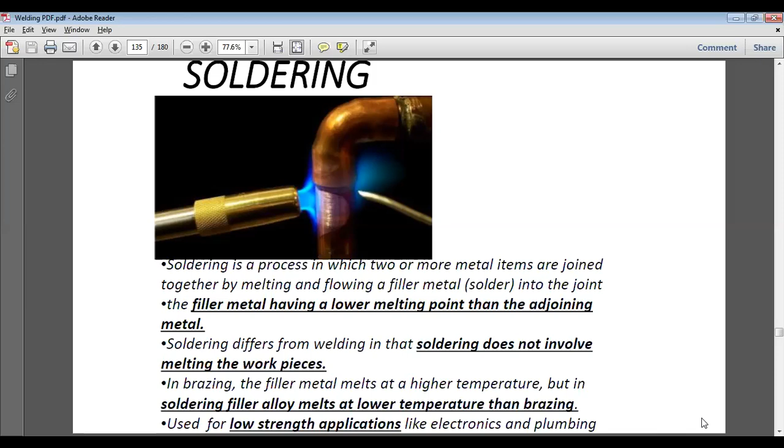We can see the solder wire, and soldering operation is performed at many places with a simple solder electrode, which requires two more things: one is solder wire, another is solder paste. By this we can connect any two wires in any two joints in electronic and control systems, like thermistors, transistors, and ICs, etc. This can be implemented in electronic, control and computing devices like laptops.

Initially we need a heat source. This heat comes by burning gases and low calorific fuels like a spirit lamp, etc. This way we produce temperature below 400 degrees centigrade. Also certain gases like methane and ethane are burned that produce temperatures below 400 degrees centigrade.

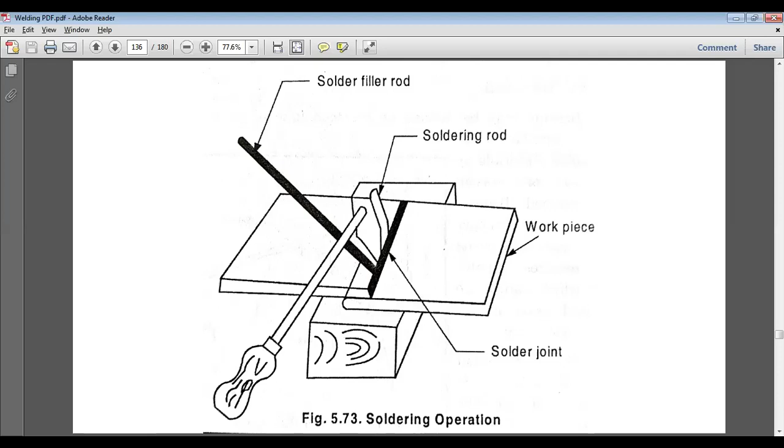So the source is a gaseous fuel source, and a filler metal or filler rod is applied in order to make the joint. This is known as the soldering operation. We have solder filler rods or filler wire that are used for providing a base to join both the two metals.

Solder wire is a combination of tin and lead. We have 40% tin and 60% lead, 60% tin and 40% lead, and 50-50. These are the basic solder wires that are commonly available in the market.

One is 50-50, then 60-40, and 40-60 - three types of tin lead solders. Then there's tin antimony lead solders, lead silver solders, and cadmium silver solders. These are used for different types of soldering.

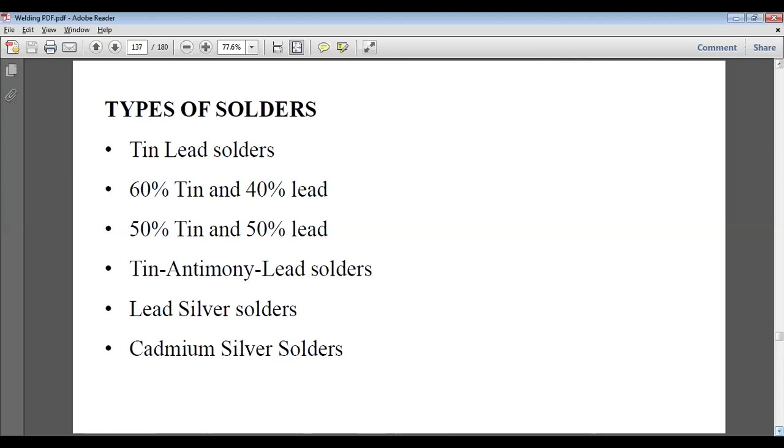Normally we use 60-40 or 50-50 tin lead solder available in the market, used for joining electrical and electronic wires and components. Lead silver is costly, antimony lead is also costly, and cadmium silver is very much costly - used for high efficiency applications in atomic and space research. So normally we use tin lead, that is 60-40 and 50-50.

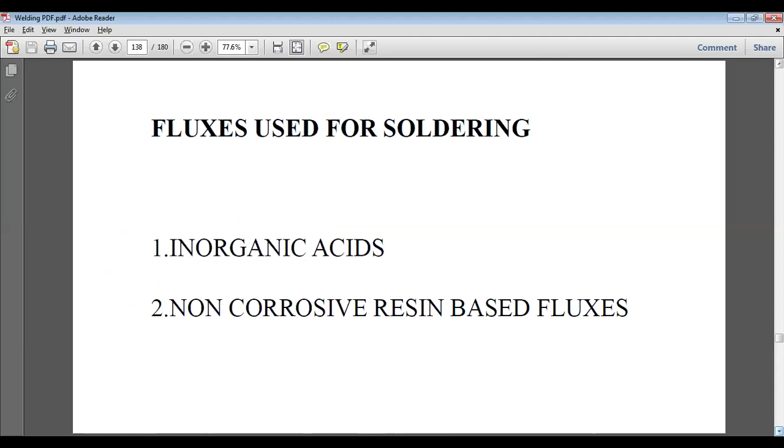Flux is also used for soldering - inorganic acids, non-corrosive resin-based fluxes - and these fluxes also protect the metal from the environment. Types of soldering methods: soldering iron method, dip and wave method.

This is a solder bath where we make a pool of molten solder metal in which we dip the two parts that we have to connect, basically for joining conductors. There we dip the end of the wires, take them out, join them together, and let them solidify. Solidification is very fast.

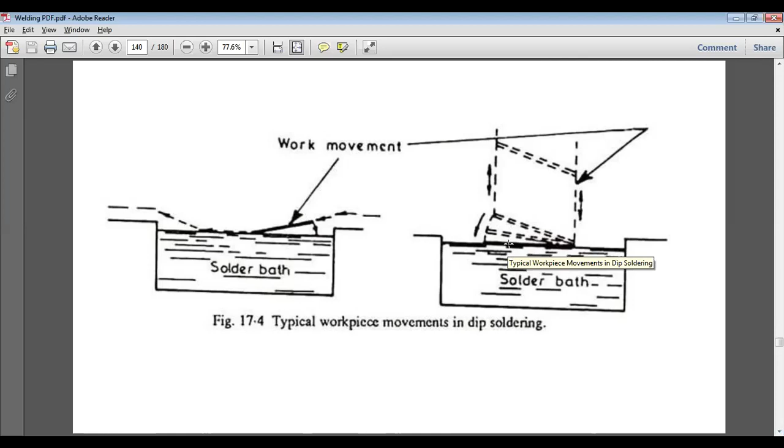So this is the case we normally use. You can see this is the work. This work is dipped, and once its edges are covered with solder liquid, it's taken out and combined together to give a permanent joint to the workpieces. So this is the work movement, and the solder bath is there.

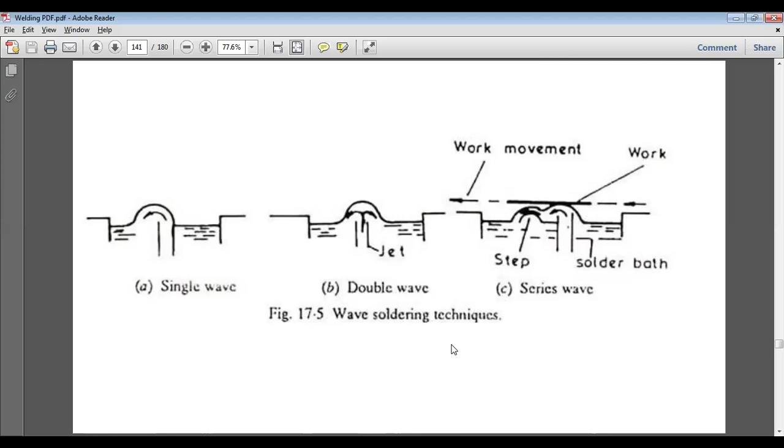Wave soldering technique - this is the basic technique. The solder bath is there, and you can see the work movement from here to here to here, then it's taken out. Single wave, double wave, series wave - wave solder technique is where we apply different waves of solder liquid. So this is the wave solder technique.

Then we have brazing - above 400 degrees centigrade for non-ferrous alloys, we generally apply a technique known as brazing. Brazing has higher strength than soldering, considerable strength, but it is not comparable - it has no match to welding, and falls well below welding in strength. So brazing is another technique we use for joining two non-ferrous metals like aluminum or copper alloys.

Their different shapes - wires, pipes and tubes, etc. So brazing is the process of joining two non-ferrous metals. It has little strength compared to welding, but at the same time more strength than soldering. Brazing differs from welding in that it does not involve melting the workpieces, and differs from soldering by using high temperature for a similar process.

A filler metal having a lower melting point than the adjoining metal is used. The filler metal has a lower melting point than the parent metal, and this way the solder rod is molten and combined with the two parent metals - this is how we do brazing.

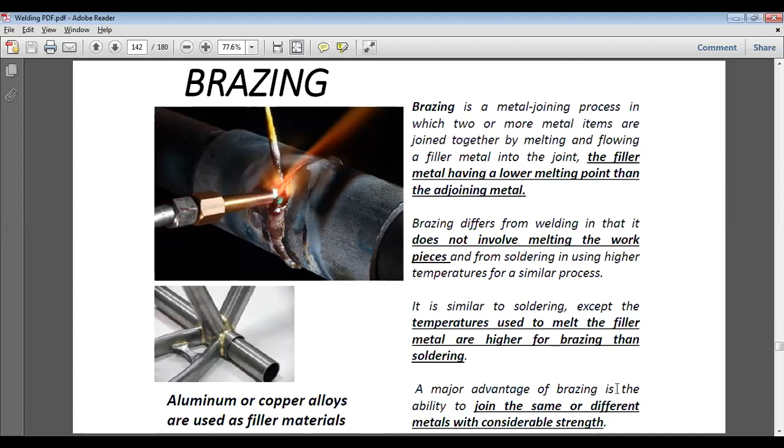This joins the same or different metals with considerable strength - aluminum or copper alloys can be implemented and produced this way. So this is the job, this is the hand torch, this is the filler rod. Then we have the basic brazing operation.

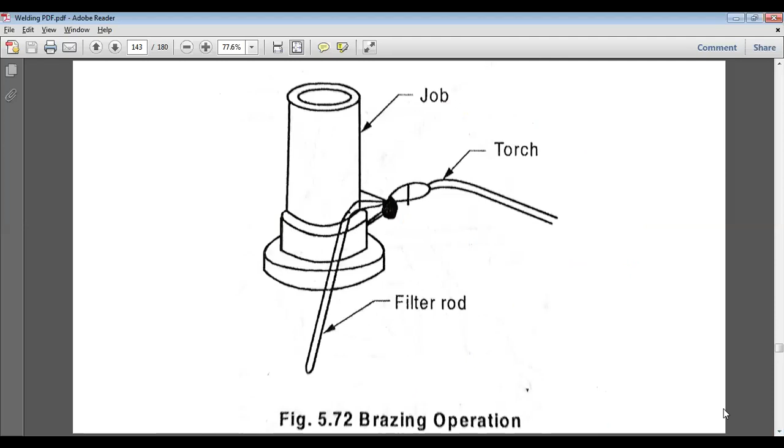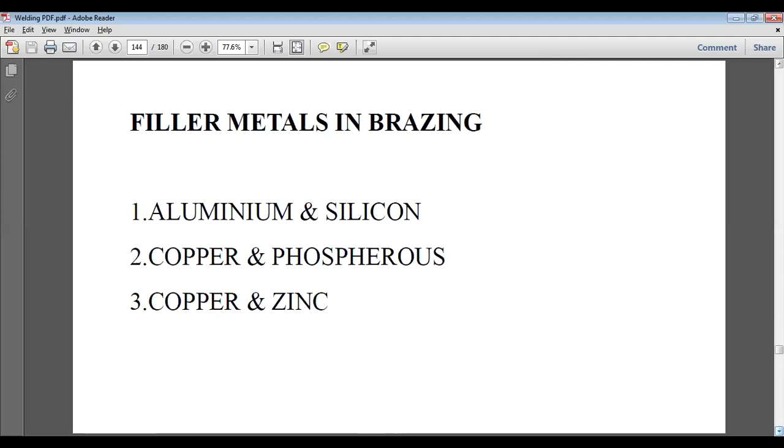This is the job, and this is the joint that is made. This way you can understand brazing. Filler metals used in brazing are aluminum-silicon, copper-phosphorus, and copper-zinc. These are three basic filler metals used in brazing.

Brazing processes include torch process and vacuum brazing. In torch process, we produce a torch as we have been doing in welding and soldering. In welding, we use high temperature for ferrous metal alloys, but in brazing we use torches of low calorific value fuels that do not produce high temperature, above 400 degrees centigrade but not 1200 or 1300.

So the temperature is low and the strength is low, making it economical compared to welding, though it uses precious metals, which makes it become more hard.

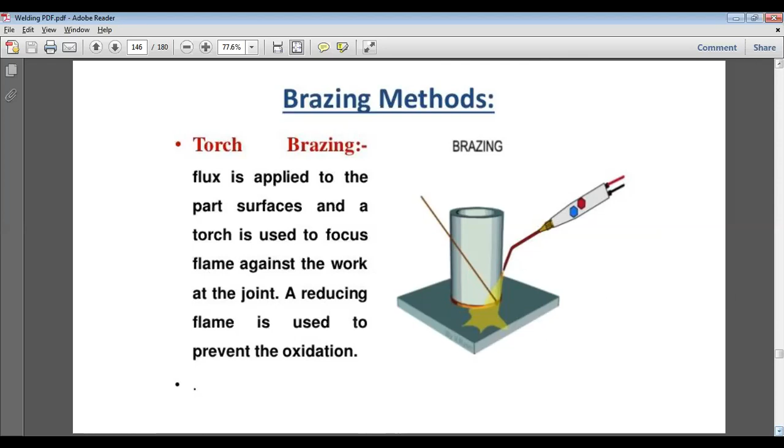So this way we have got to know welding, soldering and brazing. Now the basic difference - we have to compare them. It's very important to compare them.

Soldering has the weakest joint, brazing has more strength than soldering but less than welding. Temperature is very low in soldering, less than 400 or 450 degrees centigrade, whereas it may be 600 degrees centigrade in brazing, and in welding there is no limit - you can use very high temperatures. So the basic difference between soldering and brazing is temperature and strength: 400-450 degrees for soldering, 600 for brazing, and 3800 degrees for welding.

So no need to heat the workpieces in soldering. In brazing, workpieces are heated but below their melting point. In welding, workpieces to be joined need to be heated till their melting point, so welding is done by fusing - the edges are welded together, molten, and joined together. In brazing, workpieces are heated but below melting point - they do not fuse with each other, but a filler metal fuses with the two.

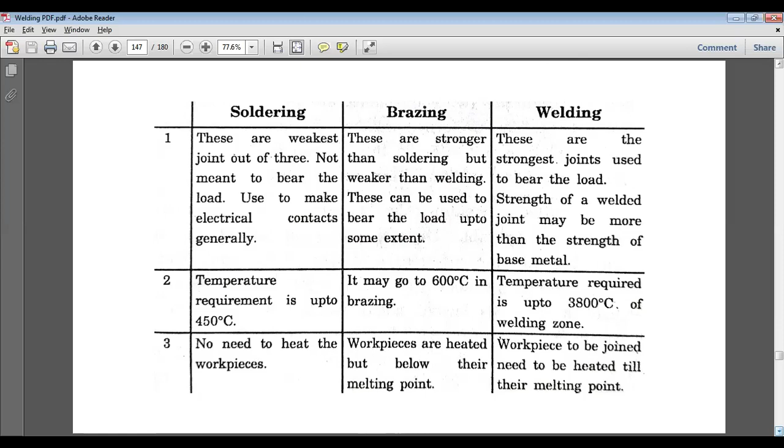In soldering, there is no need to heat the workpieces. Additional filler metal is put over the normal parent metals at normal temperature. So this is the difference between soldering, brazing, and welding. There are another 4 to 5 differences as well.

There is no change in mechanical properties after soldering because we are pouring molten metal over it. In brazing, the mechanical properties slightly change, whereas in welding there is a complete change - there may be a critical change in properties since the two metals are brought to molten form and then fused together.

Cost involved and skill requirements are very low for soldering, between the other two for brazing, and the highest cost involves welding. Soldering requires no heat treatment, brazing requires no heat treatment, but heat treatment is required for welding because after performing the joints, it becomes brittle and hard, so we have to perform heat treatment to reduce brittleness and hardness.

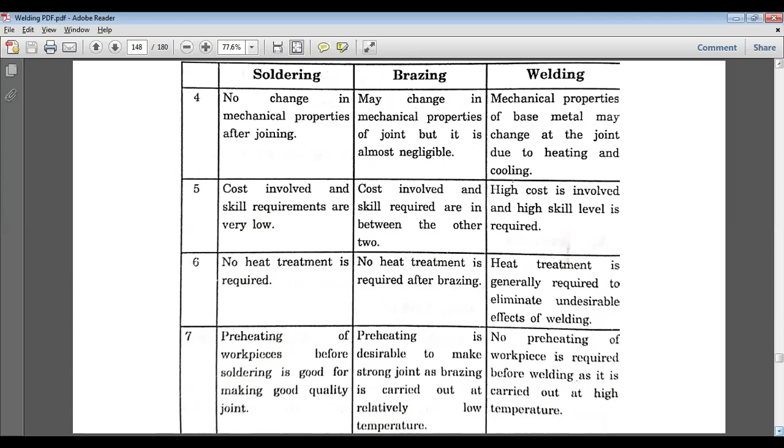We have completed the entire syllabus of workshop technology, including this fourth unit on welding techniques. We have studied different types of welding techniques, their advantages, disadvantages, applications, and comparisons. By this, I am concluding the workshop technology subject of the second semester.